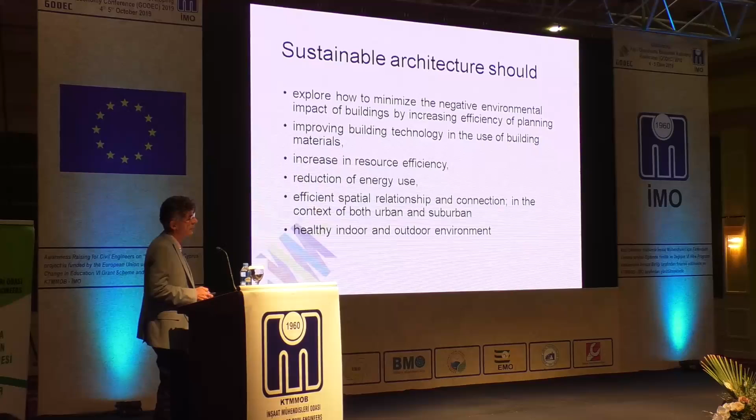We all heard about how sustainability affects us, and I'm not going to go through all of them, but I'm just going to jump through the architecture, since we talked about all the aspects yesterday.

So when we do architecture, or when we design, or we think about a project, or a site, or a building, we have to think about environment. And by environment, it's just not the building site, that it's square or rectangle or round or whatever shape that might be. We have to think about beyond those perimeters.

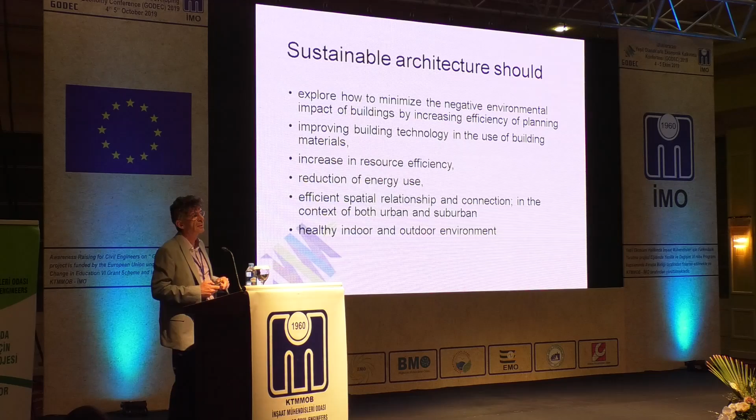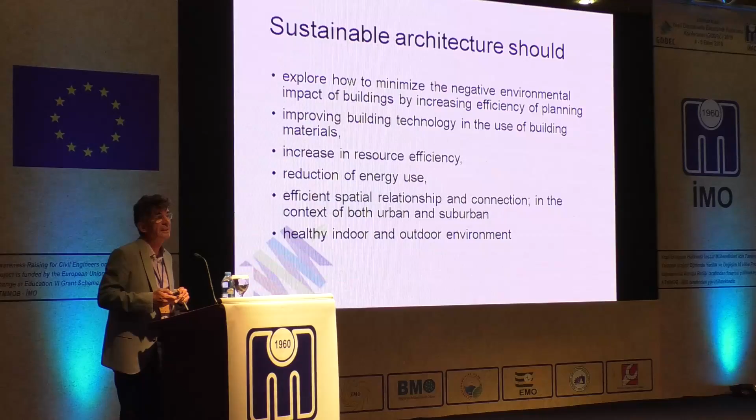And what I mean by beyond, it is a street next to the project site, then the community, then the city, then the country, and then finally the globe. The foremost goal is to minimize the carbon dioxide expenditure, and doing so we can start to think about how we can actually design before anything else.

To do that, then we go into materials. So we have to use materials. Whatever that material be, we have to use it. It could be material from local, it could be material from imported, it could be material from right on the site, but we have to use something to build with. Otherwise we cannot build. So we cannot ignore the materiality of the architecture.

That's one of the big equations in the whole sustainability. And today I'm going to talk about that. And we have to think about how we can find resources in a more efficient way in order to make this architecture or the environmental impact, and if we have to reduce the energy use when we design.

It's not just the engineers and policymakers, but our architects have to be a big part of this reduction in energy use. How many architects in the house? Oh, there's one. I'm very disappointed in our chamber of architects.

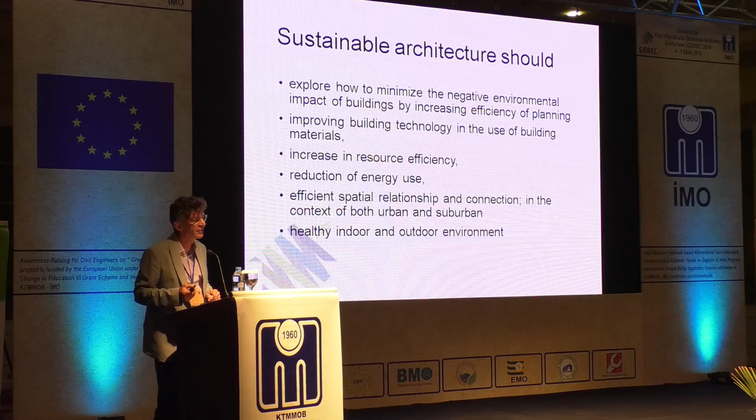Okay, then I will jump right into, we talk about green architecture. It's in quotation marks because I think the green architecture today is used very loosely, and the word green actually doesn't mean a lot of things. But since everybody's using green architecture, then we have to use it as part of the industry's standards. Any architect can call their architecture green architecture, but what does that mean?

An architect can tell you, I designed this building that it looks towards the ocean, that's why it's green. I'm just exaggerating, but it's not that. The green architecture should actually start from the site and then move towards the global scale. Green architecture is not equal to sustainable architecture.

Sustainability is totally different than green architecture. Architecture by itself cannot be a sustainable building. It has to tap into the community. It has to tap into the globe to become a sustainable building.

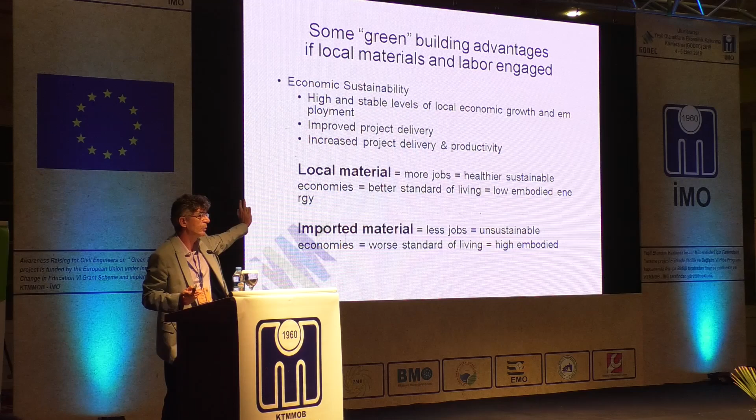So that goes well with materials in architecture. Imported materials mean fewer jobs for the local economy, and they don't actually help sustainable economies. Because the people who produce this live in some other part of the world, and we use it here, those people and us have nothing to do with each other. So we don't actually gain from their product. That equals a worse standard of living, and a high embodied energy.

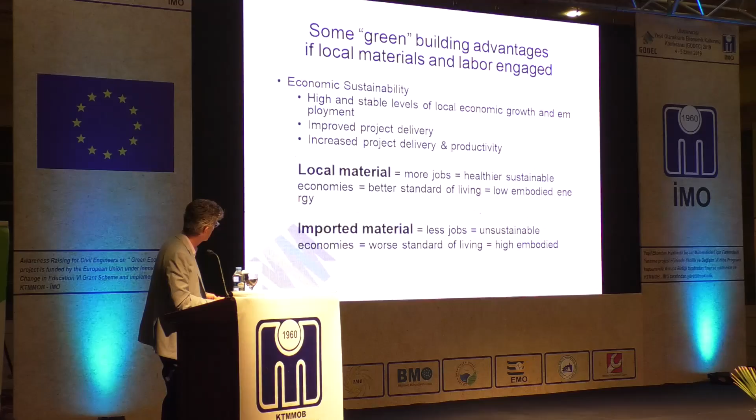So I'm going to talk about three projects, three continents, and a building material suggestion for Cyprus. The first project is in Madagascar rainforest, where I'll talk about education and job opportunities in architecture. Then Cyprus - an urban project - and a North America rural project. Those are the main points of each project I'll cover.

So when we measure green architecture, who is to say that your building is green or not green, and how do you measure this? There are a lot of entities - these are just some of them. Leadership in Energy and Environmental Design, the USGBC entity, is an NGO, and BREEAM is mostly in Europe. USGBC, United States Green Building Council, has a lot of rules, regulations, and points for listing.

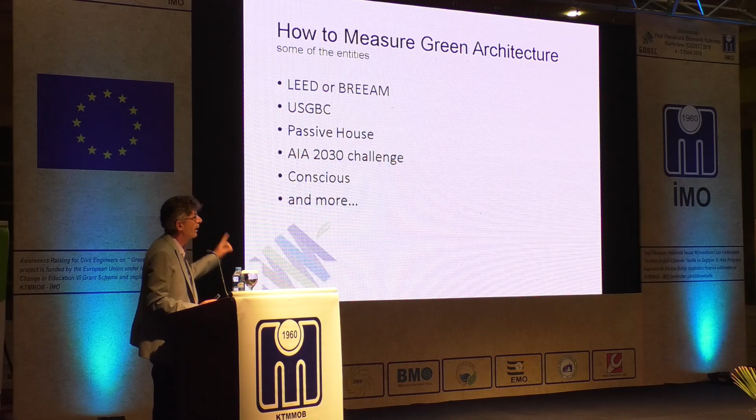Passive House started in Germany, and now it's spreading throughout the world. The AIA 2030 Challenge - I think Halil mentioned that yesterday - our office in the US is actually committed to that challenge. We signed an agreement with the American Institute of Architects that we will work towards it, and we are working towards it. You have to be conscious, think about how you're going to design and how we can be sustainable. And of course, more and more.

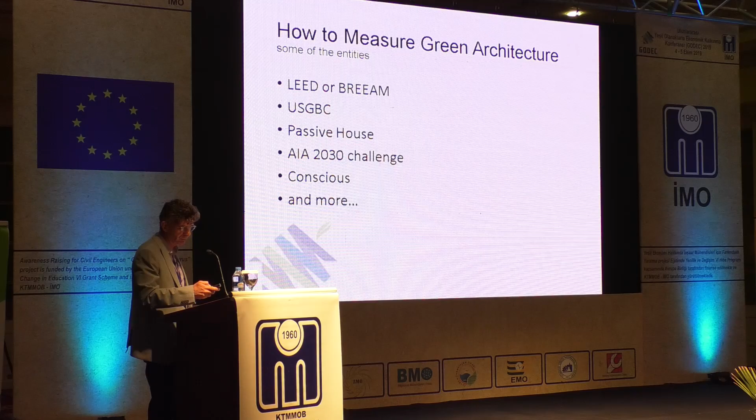So what does sustain actually mean in a dictionary? Sustain is to keep in existence and maintain. So if we can keep a building in existence and maintain it with the materials we use - if this light bulb goes out right now, we may have to wait two weeks to replace it because it's coming from Scandinavia or China. But if this light bulb was produced here, I could go get it from the store and replace it right away. So what does that do to our sustainable meaning?

You have it right away. If this light was out yesterday, I would have been without light until I could change it. Again, I'm exaggerating a bit, but to make my point.

So this is a monastery in the Kyrenia Mountains, and I'm going to refer to this picture one more time. You see how the monastery and the mountain are almost melted together - you can feel that the monastery was built out of this mountain. You can see the detail of the stone wall it was built from. When you look at this and this, they're just one body.

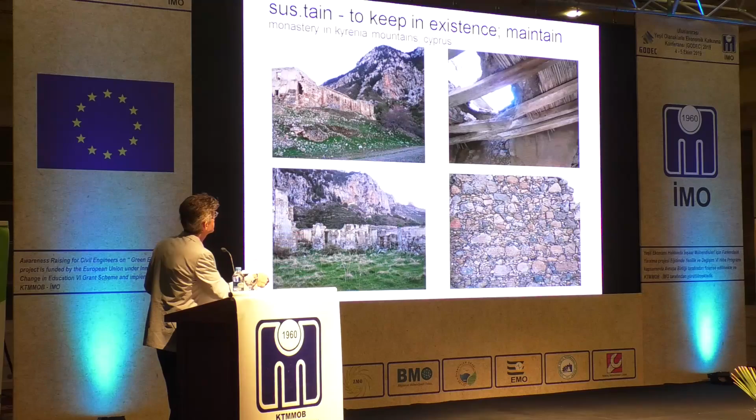In the same monastery, you have the ceiling construction, using a technique vernacularly used in Cyprus. Basically these are the beams - most likely cypress trees from the area - with reeds above them, and a mud and clay mix on top.

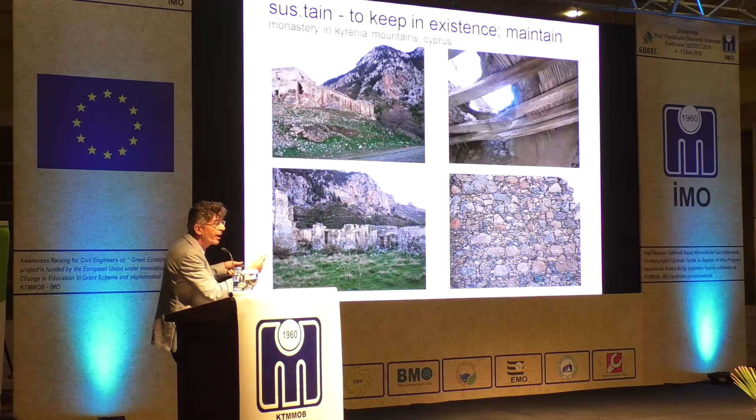If they didn't have reeds and clay next to the project, because the clay dries during the summer and you have to put another layer on top to maintain it - if that roof was aluminum-clad, how would they maintain it if something happened to the aluminum? You'd have to order it from China. But the clay is right there - you dig it, mix it with water, apply another coat on the roof, and voila, you have another roof for another season.

I'm going to come back to that slide. So the first project is in—

it's a research center, education center on the island of Madagascar, southeast of Africa, in the southeast rainforest of the island.

As an architect, you go to a place, get inspiration, do research, and then start thinking about your project. So this village was our inspiration for the floor plan, how the locals live, and how we can propose something that they feel comfortable with.

That when they go in there, they feel like they're in their village. And then you go through all your research and construction techniques, how they use their local materials, and how can I learn from this?

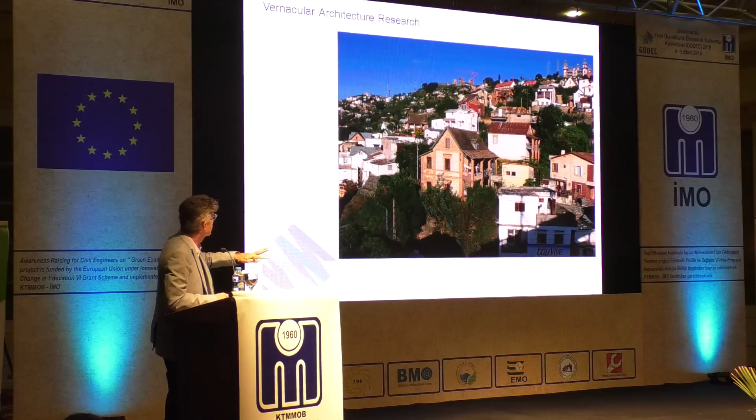That's how the Malagasy people actually form their villages, and it's not different than any other villages around the world. There's always a plaza. We always look into the plaza.

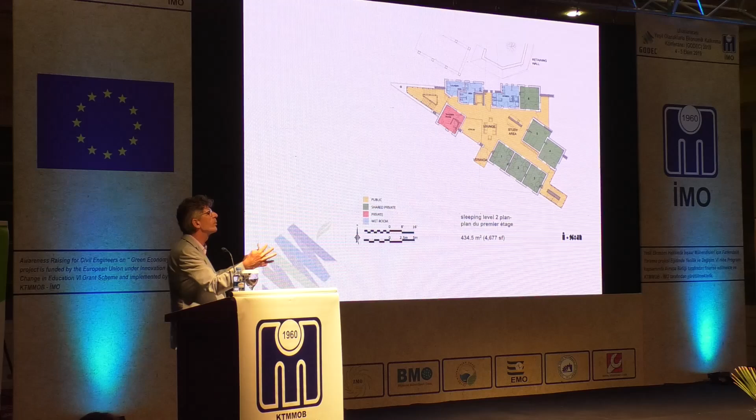And then you start thinking about how I can work with the current creek water feature, and turn it into a more sustainable way for locals to use it instead of constantly draining into the river.

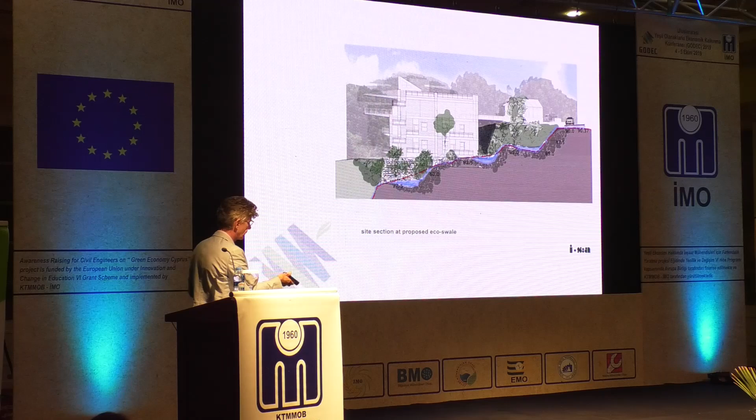So what we propose is—and this doesn't look right, the little red thing—so we propose an eco-swale.

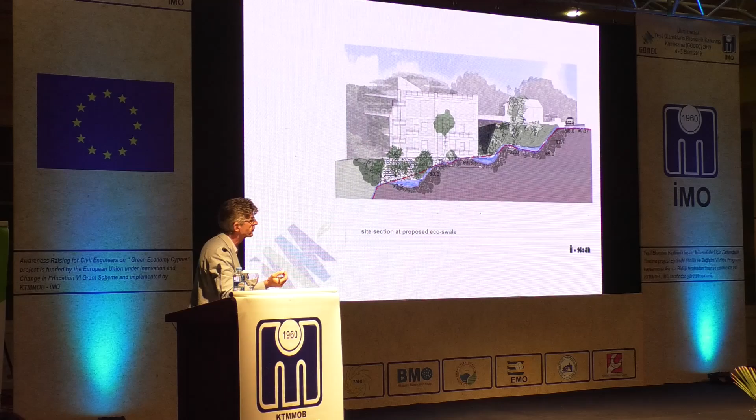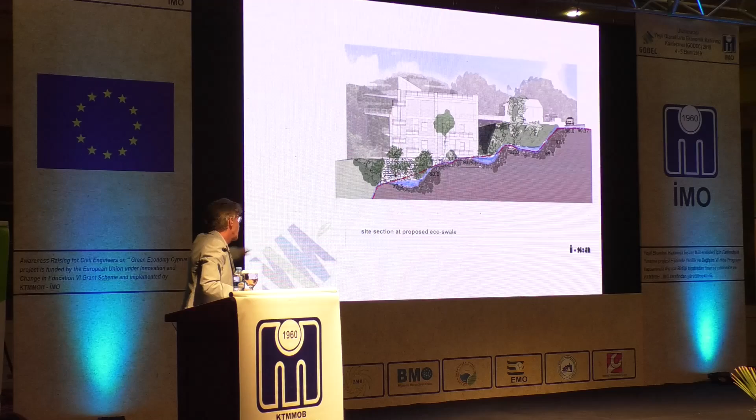The red line is how it was before, and the swales are what we're proposing. So what we're proposing there is to create a little pond that they can actually do fish farming in. Otherwise, this river is going to drain into the larger river, and all the fish that comes from upstream will go to the bigger stream.

And then we start thinking about how we can make this building breathe, to have daylight, so we don't have to turn the lights on till it's dark. We don't have to turn air conditioning on. We don't have to have heating on till we actually need it.

And these are all from the beginning of buildings—society, people, we used to build things with local material. Why do most cave openings look to the east? Why do we build with local materials?

These are all people that learned from their conditions and built to that. If I build my cave opening to the west, then in the morning the sun's going to rise and I'll still think it's nighttime. So the sun comes up, it goes into the cave, and then I wake up.

So there are architects here, they probably studied this in architectural history, but these are very simple things that we're actually forgetting about right now, and we're now going back and researching that, saying these were a sustainable way of living. Let's go back and learn from these.

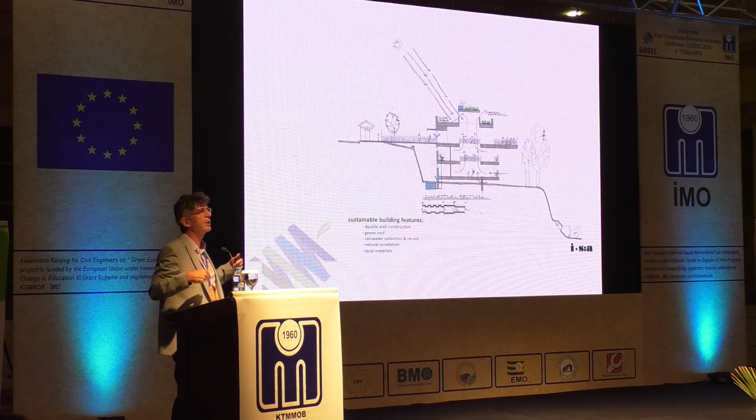It's very interesting. And then how do you actually collect water? It's a rainforest, so there's a lot of water. So what do we do with this water? We, of course, collect it. You're not going to have the building drain into the river. So we collect it and we treat it.

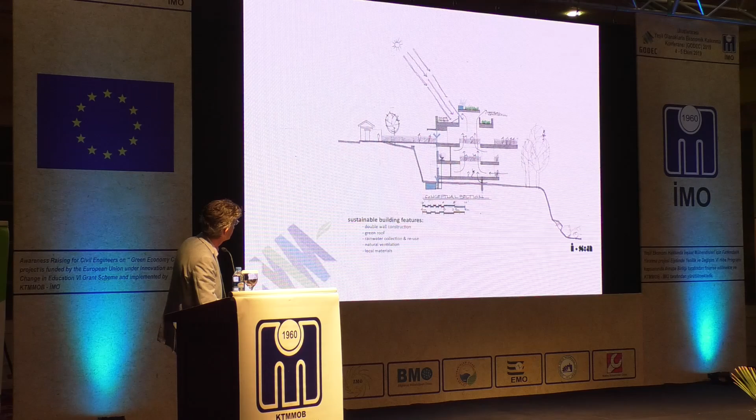And all of the toilets in this building use gray water from the rainwater. They are collected through the green roofs. So green roofs keep the building cooler, and then slowly it gives into the cistern system.

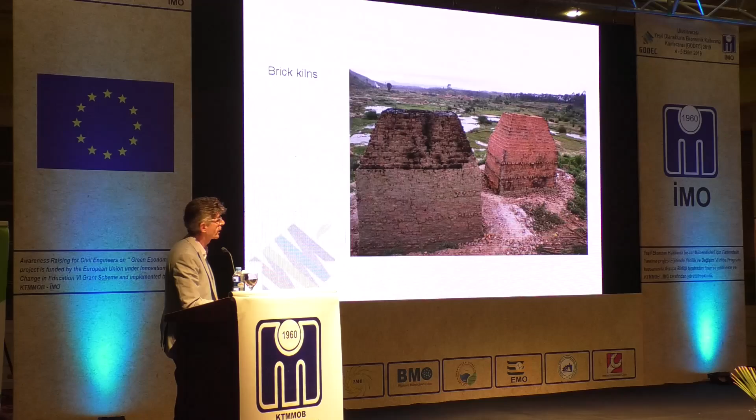Another example of the brick kiln burning. This is a village next to the project site.

Madagascar is a geological island, so there's a lot of granite. So we chose two materials, granite and brick. And the granite comes in a lot of different forms. This lady is actually breaking gravel for our building.

About 10 villages broke gravel for concrete for our building, for 6 years. There's no machines, there's no concrete plants—everything is done by hand. And the sand was dredged from the rivers, and the building's concrete was all built that way, mixing it by hand, of course.

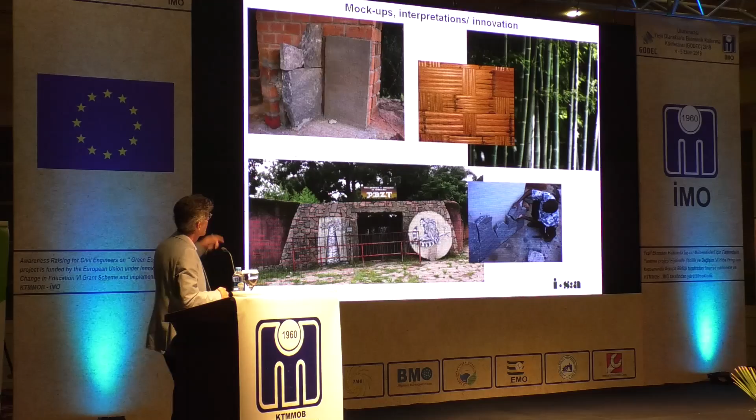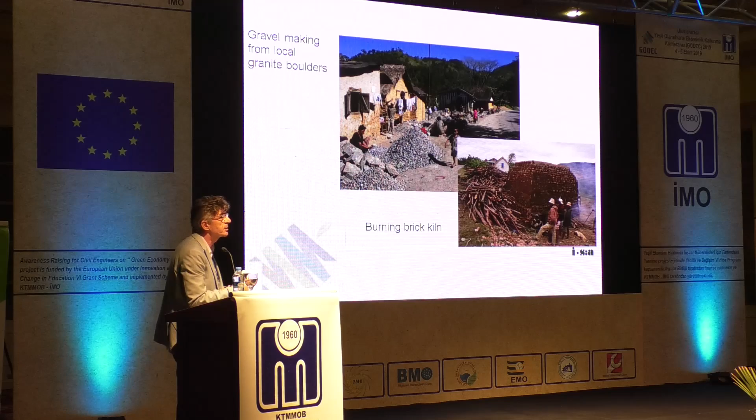So that way, that material, and this lady, you see the house behind it. When I went there 3 years ago, that house was plaster, new windows, everything was looking great. Upper part of the village there was a little pension, just a hostel, and in the 6 years we were there, it made the local economy grow exponentially.

The granite, use of granite in the local zone. So we decided we'd like to use that granite in our building, and we did a lot of mock-ups. There's a lot of bamboo in Madagascar, and we used bamboo in our ceilings.

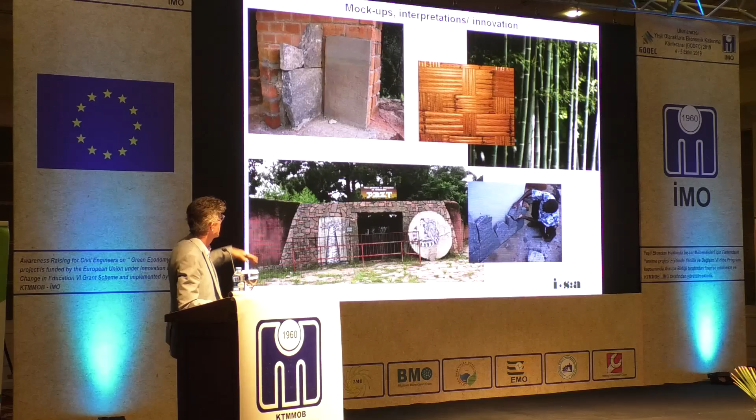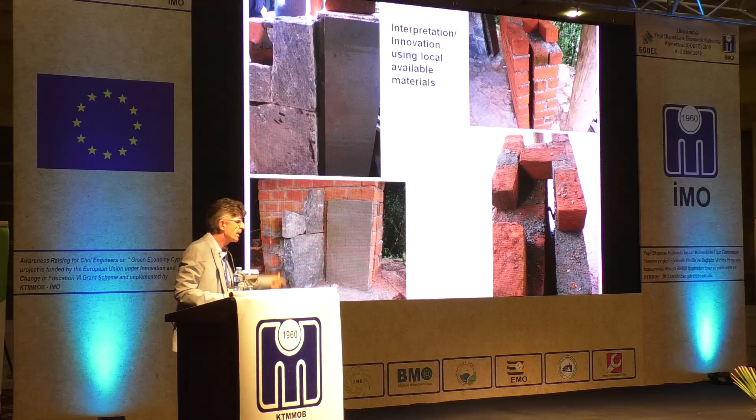We interpreted their local materials with the innovation of new technologies. They're used to making bricks, double or triple wide, and then setting them on the ground. Of course, it rains, and every time it rains, water sucks up into the wall and crumbles at the bottom.

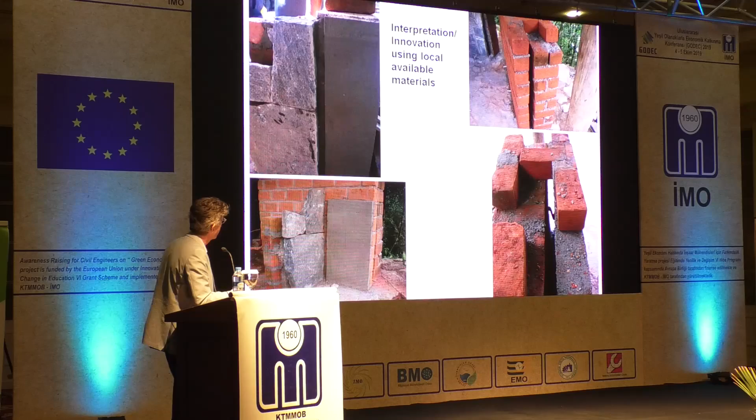So we introduced the cavity wall, using their brick but showing them how to do the cavity wall, and how to join the plaster with the granite and brick. Then they used the materials that way.

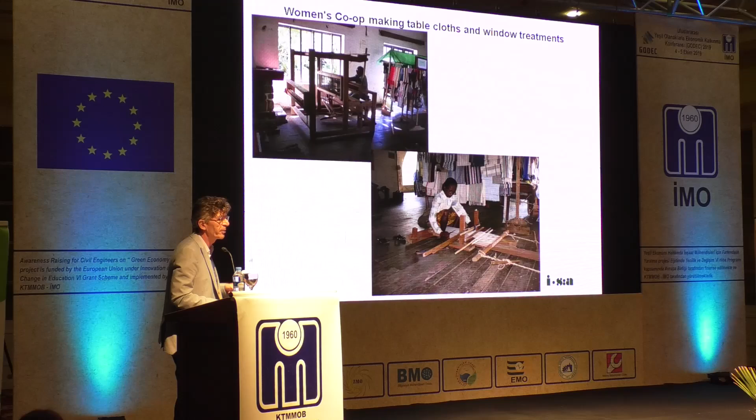We also engaged the Women's Co-op to do all our table cloths and window treatments. They made these in silk and cotton, and they're beautiful garments. I have many scarves for my wife and myself, and there are a lot of great designs.

One of the things, when we first went there, the University of Stony Brook in New York is the major donor for this building. It's a research and education center. They told us we have to educate local craftspeople, so they learned how to do plumbing, masonry, and electrical work.

A big part of this, we went there and did a lot of workshops. Now those people who had no skills are plumbers and electricians. They don't have to go to the capital city to make money - they can stay there, since the economy is growing.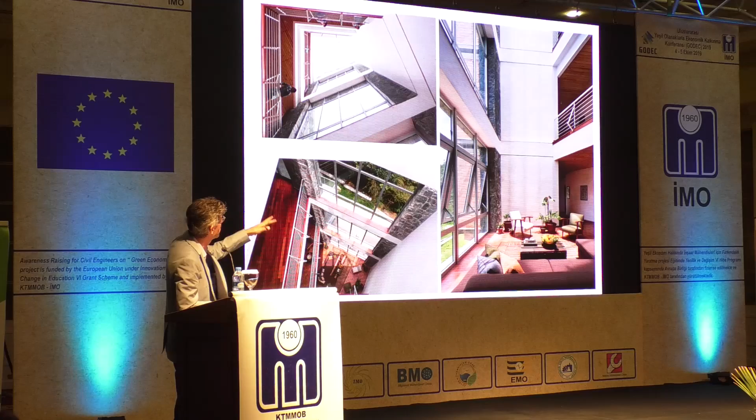Use of brick in different ways - we use the granite as a paver, we use granite on the walls. And how do you connect with the existing building on site? What is the connection? An interior using bamboo flooring.

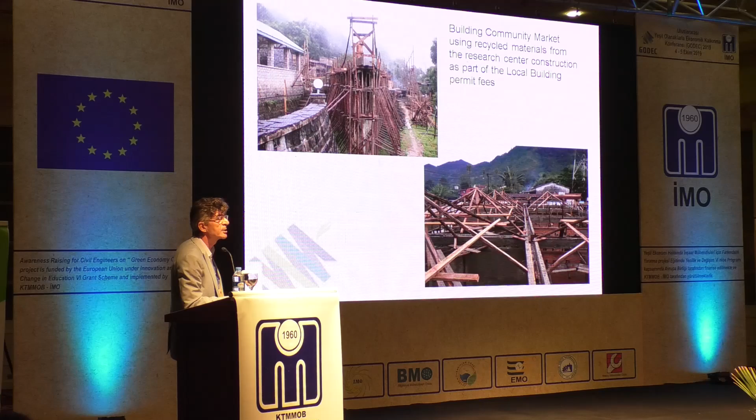When we did scaffolding for this building, they're really famous for doing all the bamboo and eucalyptus formwork. Part of the municipality's building fee - we agreed to build them a marketplace in their downtown. So all the materials from the building scaffolding went to build this marketplace as part of the taxes, basically. This is their marketplace right now, with different stalls selling their local garments.

The second project is in rural America, in the state of New York. The owner had barn buildings that were about to collapse. They told us, we want to build a small building, zero net energy, and we have these barns - can you take a look if we can use them? So we went and measured every single beam and designed a house for them using those measurements.

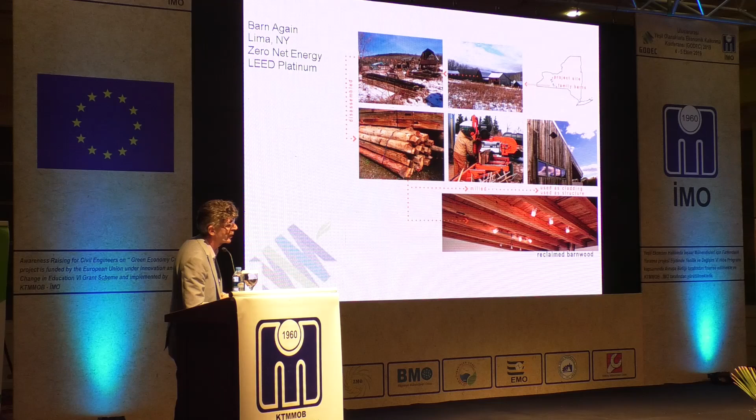This house actually received a LEED Platinum certificate from the USGBC. As architects, we like to see how we can make this house zero net energy - the energy consumption is the utmost equation here. So this house has PVs and a geothermal system.

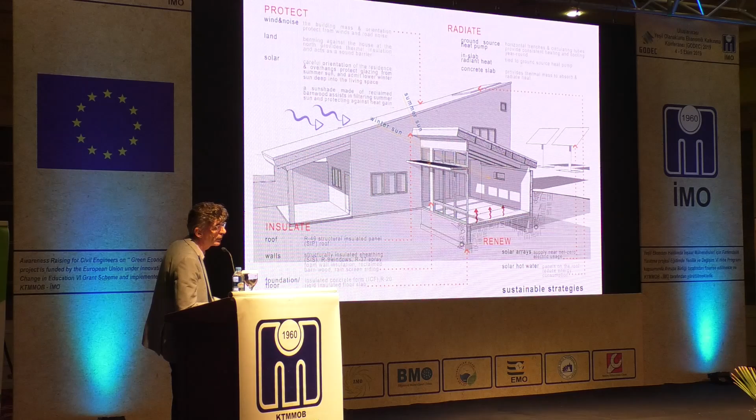And of course, the passive systems as well - the sunshades, concrete floors, and very high insulation value. The house uses only materials from the barns. This high area is where we bury the house in and put all the geothermal system underneath, so we can get the geothermal advantages.

Again, the use of the barn wood - we didn't put any paint on it. It will age, and it has aged, and it's aging, and it's becoming beautiful. As I get gray hair, this building is getting grayer as well - it's a natural thing. Buildings are living entities, so we have to recognize that. It's not just brick and mortar, as Americans say.

It's a very, very small house, a one-bedroom house, and a garage that is actually larger than the house because he had a lot of toys. And the beams all are from the building as well.

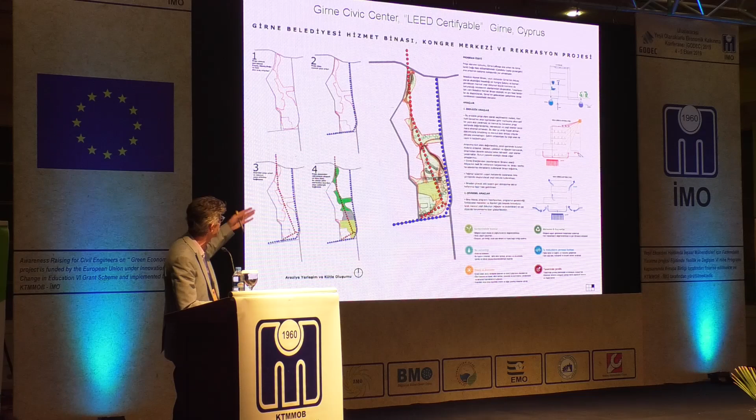The third project is in Cyprus, in Girne. We're still working on the project, so I don't have the final pictures, but I'll show you some of what we have. Again, I'm not going to go through the analysis of what we do and what kind of system we can use before we start the project. You have to think about all these systems before you start, not while you're constructing.

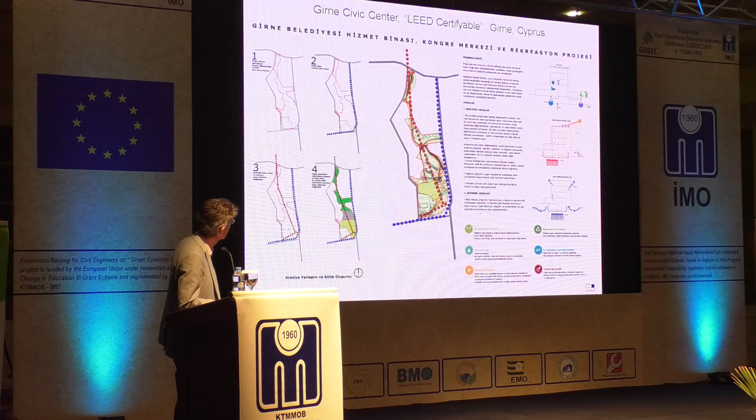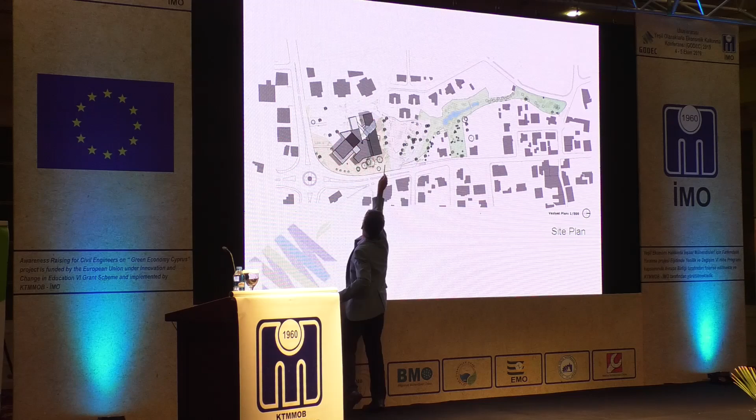It has to be planned. How do you connect to the rest of the street? Can you add more green without touching the existing flora or trees? All the trees that you see here and there, and the shape of the building, is because of these existing trees. You just work with the plan.

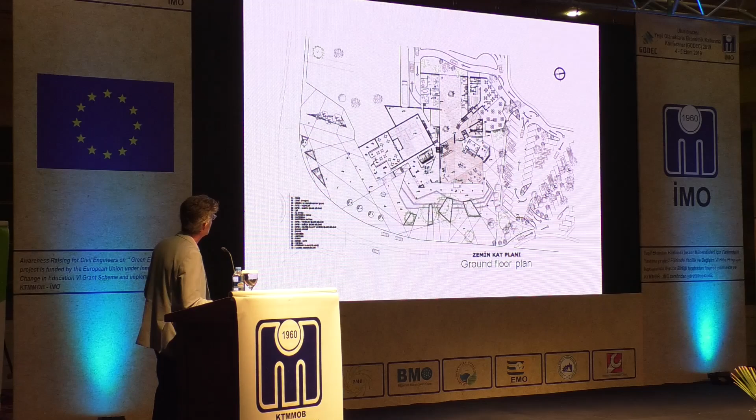The building, I was inspired by colonial architecture in Cyprus. Most of you are from Cyprus, so you'll know the courthouse in Lefkoşa, the courthouse in Girne, the courthouse in Mağusa. They were all done by British colonial architecture, and they all have larger balconies and terraces where people actually go out and socialize. So the social idea for this building came from that area.

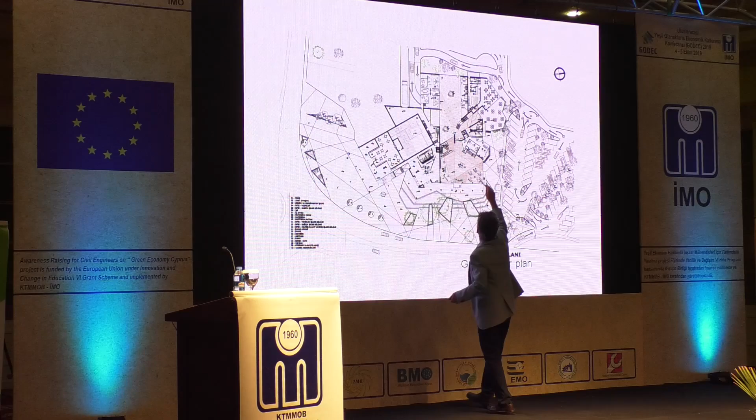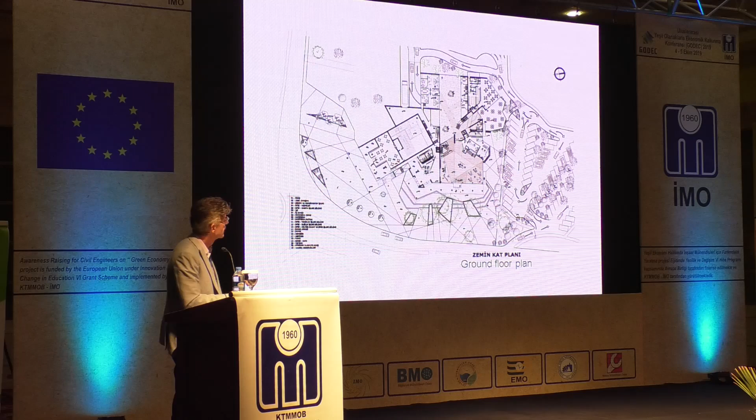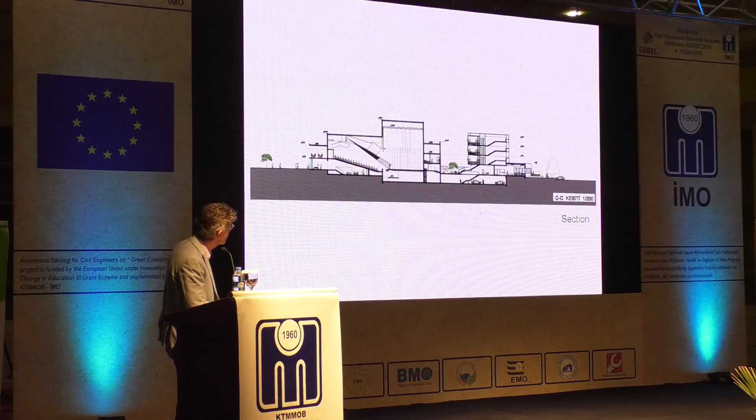And then there is a courtyard in the building right there, and the stairs that actually act as a social entity of the project. We Cypriots love to have coffee and talk, so we have to provide them the benefits of that, and smoke. You cannot ignore it. If you live in a culture and you're an architect, you have to know about your culture. You have to give them what they think will be the best. The courtyard is an important part of this project.

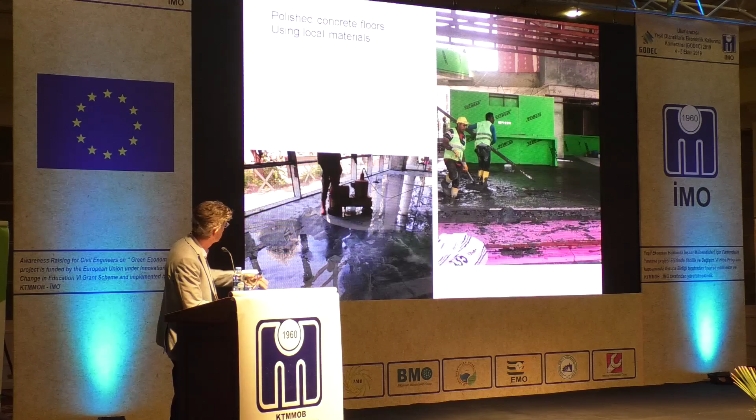And local materials - all the flooring for the entire building, which is 10,300 square meters, and the plaza floors are done with local gravel. We introduced this exposed aggregate, and did concrete floors using all local aggregate with insulation below them, and we did all polish. We did raised floors using local manufacturer panels.

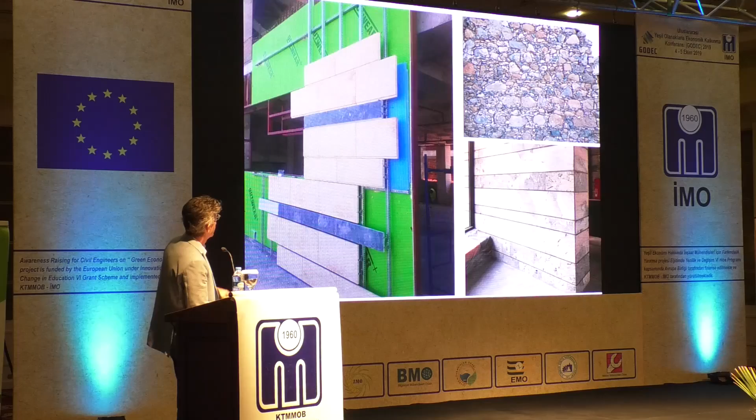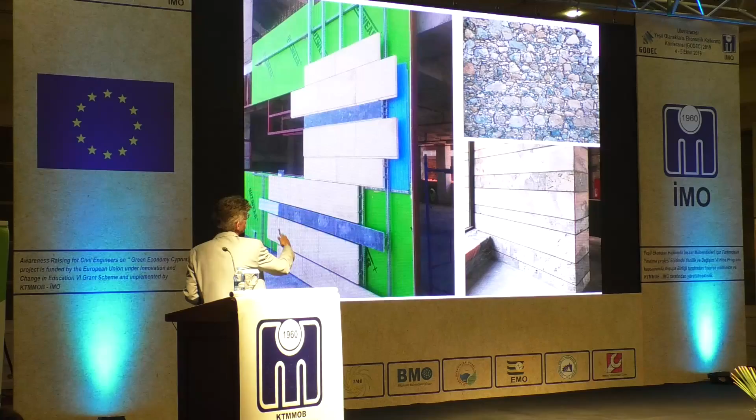And for innovation, I inserted that little picture on the right hand corner to show you how it was used 300 years ago with the mortar, and how you can use the same stone in the 21st century with innovation and interpretation. This stone is the same stone as that. This gray stone is the same stone as that. In this project, I used that stone in 3 different forms - I finished it with a polish, I honed it, and I left it rough.

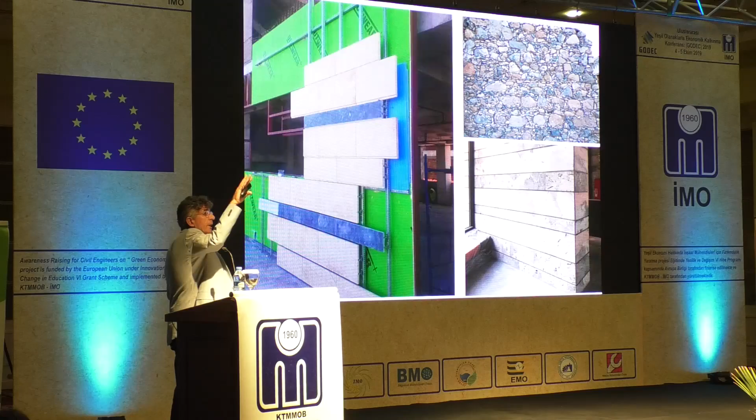And the building, because of the system, has a rain screen detail. This is an equalizer of the pressure from outside to inside. What happens in Cyprus is that most houses are brick and mortar, and when rain hits the brick and mortar, because the inside atmosphere is lower than outside, there is a constant travel towards the inside. But if you balance it and equalize it, it doesn't travel. So this actually does that - no rain will travel into the building, it will stop right there.

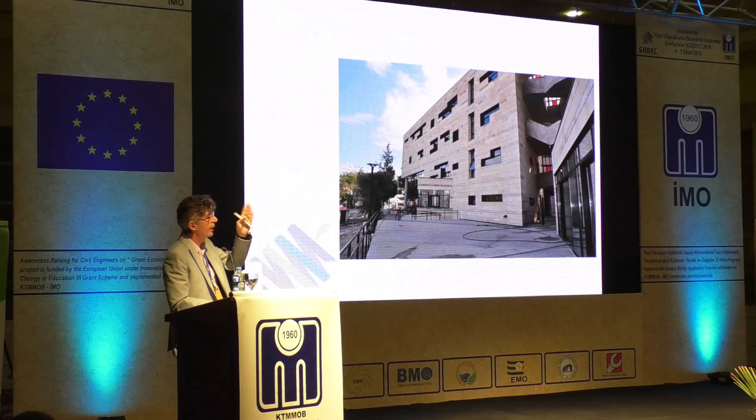We use integrated solar photovoltaics as a vertical application. They have 30% transparency that lets a little light in, but also generates electricity - the black windows.

Those are the existing trees that we built around. And then the inspiration of the courthouses is those stairs - they're sculptural, one goes this way, one goes here. So when you're here, you look down and talk to somebody on that element. They're not stacked on top of each other like traditional stairs.

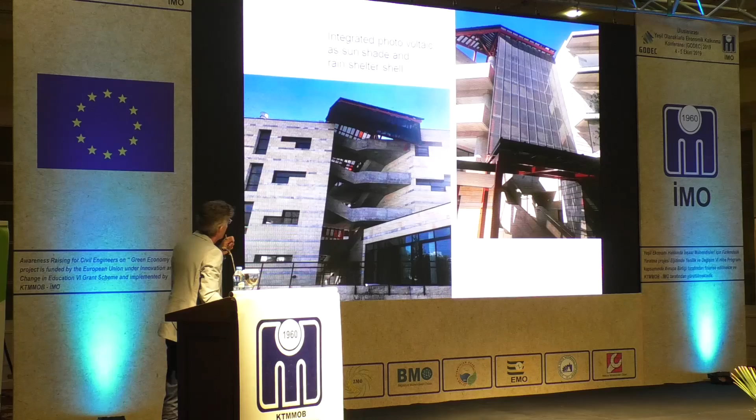On top of it, in order to do some sunshade and rain shelter, we built this, and we also use integrated photovoltaics for this as well. We use some color - when the sun hits those reds or yellows and it hits the ground, you get a Mondrian effect of different colors. That's the stairs looking up, taking the photograph looking up this way, then on the right.

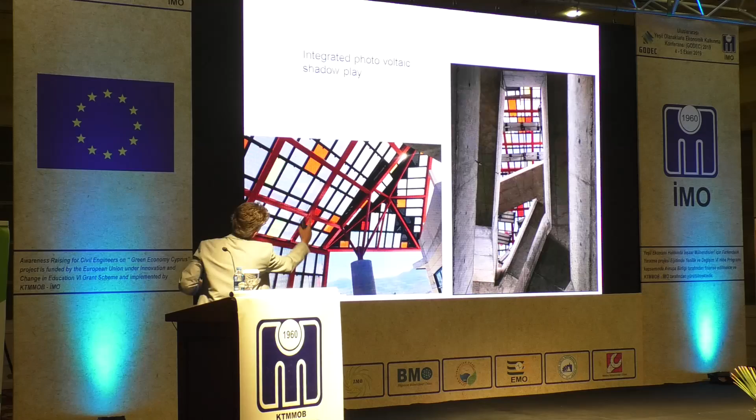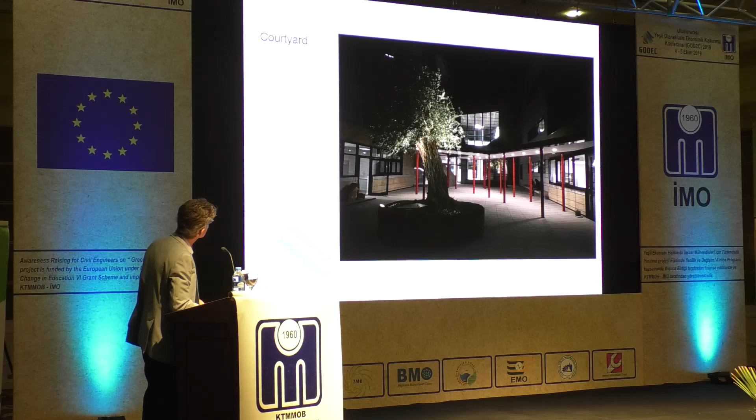And you see the shell on this side of the building. All the roofs are planted roofs. This is the courtyard where people will hang out and have coffee and smoke cigarettes and chat. We clad the entire building in this local material - imagine how much work we created doing this instead of bringing aluminum cladding from China, let's say.

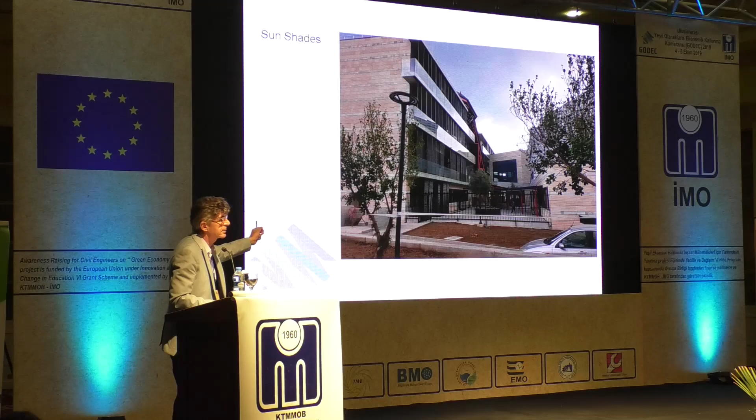And then the building actually sat in two heights. One is lower than the other in order to bring the winter sun in. But in the summer, these offices all have a shade structure that you can close and open to regulate the sun. I did a temperature measurement from outside and inside, and there's about 8 degrees difference when they are closed.

And then my suggestion for... I'm going really fast, I know I ran out of time.

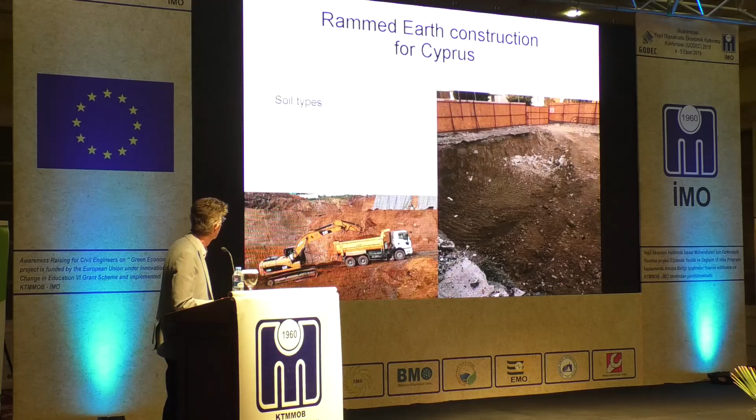So this is a building technology or construction system that I think if the Chamber of Civil Engineers, Chamber of Architects, Chamber of all the engineers think about this, we could use this material to build 2-story, 3-story buildings. Right now we're digging basements and taking the earth, I don't know where. They're going somewhere, but nobody knows - in the sea, in the riverbeds, landfills. So you actually use a lot of sand and gravel.

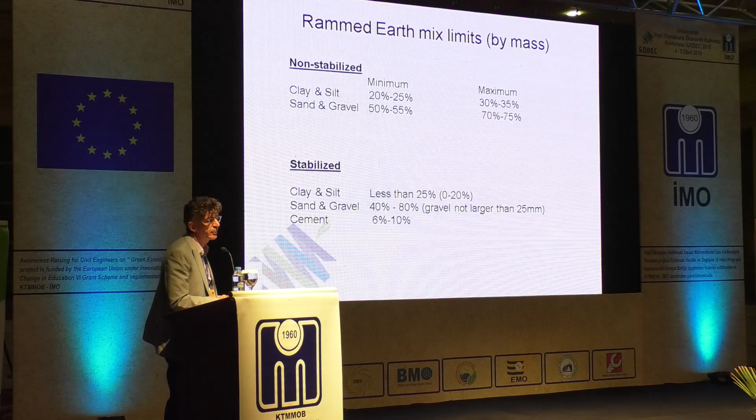If you do a non-stabilized system, which has no cement, or a stabilized system, which has by volume, by mass, only 6 to 10% cement - then the material is already here, and you don't have to use any energy. And you can build walls with a rainbow effect like this.

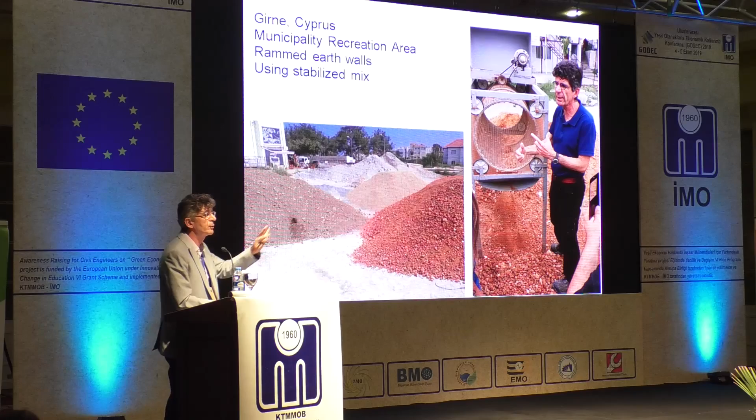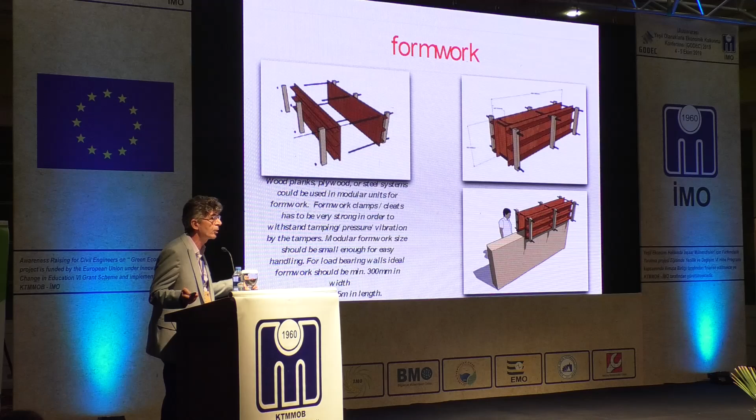And I did a lot of workshops on this, and some projects for the municipality using this. We found 3 different colors of earth from different regions of Cyprus, and we sieved them, mixed them, and used the formwork that Cypriot contractors are very familiar with because of concrete, and we detailed these walls that way.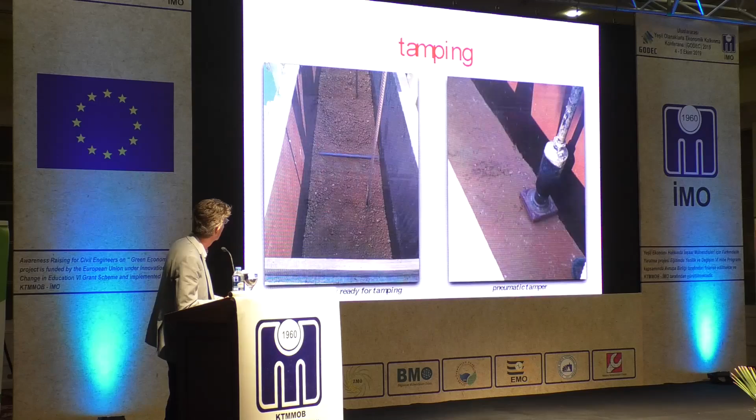You just put the earth in it. It's not mixed with a lot of water, just a little bit, so you can compact it to 99% compaction. And then you can detail it, do some architectural details.

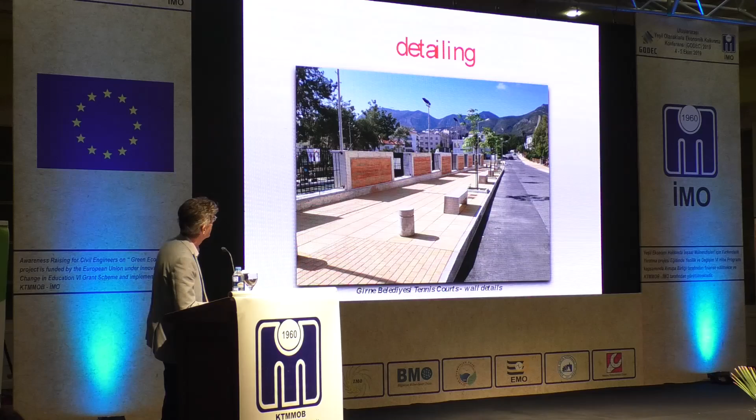And these are the walls for the Kyrenia municipality's recreation area. So instead of doing all steel or other materials, we actually designed the concrete benches and trash cans and such for this little project. And then you can do a project like this. Thank you.

Questions, or later? Yes.

So for the Madagascar project that you were involved in, for clarification, did you use concrete for structural elements? My question was for the Madagascar project - did you use concrete for structural elements?

Yes, we did. Madagascar is in a cyclone region, so we had to use a concrete structure in order to withstand those forces, wind forces. There are about 110 kilometers per hour winds that come through the rainforest. So the structure is concrete.

Yeah, I do understand. Yet, may I ask, what was the local material that they were using in the past for structural elements, for ceilings? They were not building columns for sure, but maybe for beams. They used plaster, stucco. Thank you so much.